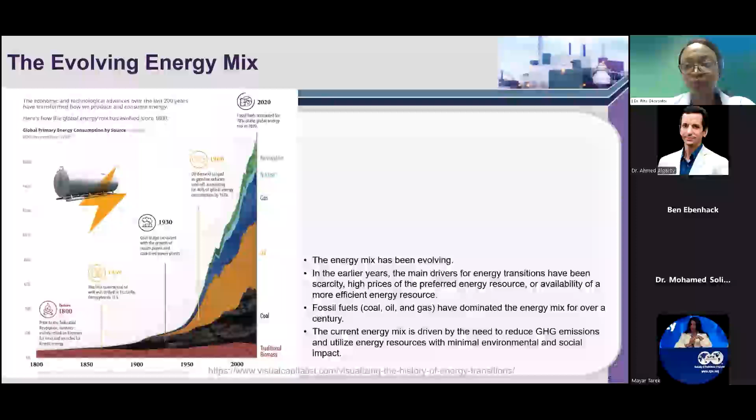So it's been changing in different percentages of different sources of energy. In the earlier years, the main driver for replacement of one fuel source over another has been scarcity or high prices, so demand and supply has driven a lot of it. But more recently, what we're beginning to see is the need to reduce greenhouse gas emissions and utilize resources that are closer to us, with minimal environmental and social impact. So the drivers for the energy mix now and moving forward are no longer solely demand and supply, but energy security, and not impacting our environment socially and environmentally.

So in a broad sense, we look at different sectors that have utilized fuel before now and the associated emissions with them. This figure shows different sectors: industry, electricity, agriculture, transport, and buildings, to look at their percentage contribution of emissions. The reason why it's good to look at it from this perspective is because that way, if we're trying to look for solutions to address emissions, we could actually go on a sector by sector basis.

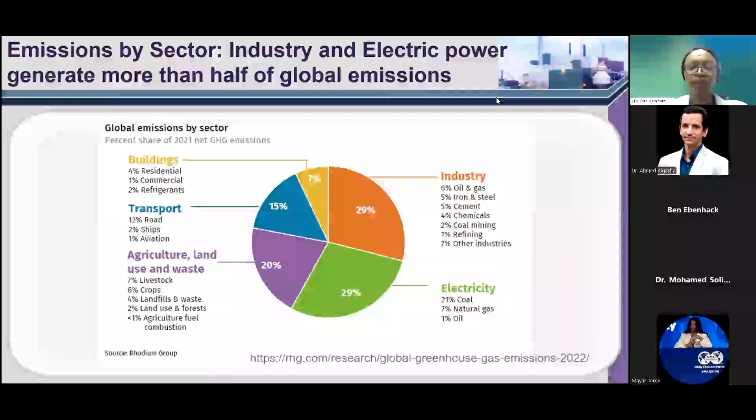Let me see if I can remove this stuff here. Okay, all right. So with that, when we think about pathways to decarbonization, we see things like when we look at buildings, for instance, we try to think about ways to reduce emissions.

For buildings, we have energy efficiency and conservation approaches. When we think about the transport sector, we could either think about electrification or using cleaner fuels. Then we look at the agricultural sector and think about how we can make changes to our land use to reduce emissions. And then we have things like carbon removal and carbon capture, utilization and storage that address a mix of different sectors, especially electricity generating sectors, power generating sectors.

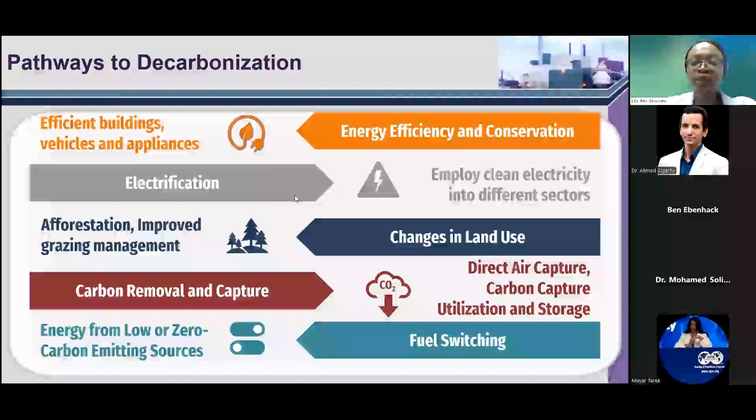Then fuel switching comes when we consider replacing a source of fuel or energy that we have with something else that is low emitting or zero emitting in terms of greenhouse gas emissions and carbon. So the question is, where does hydrogen come in all of this? Let's start with, why should we even be having hydrogen? So we think about hydrogen in the context of the hydrogen economy. What we're trying to say here is that we're beginning to replace different parts, sectors of the system where we would have been using all the other sources of fuel that may be generating carbon.

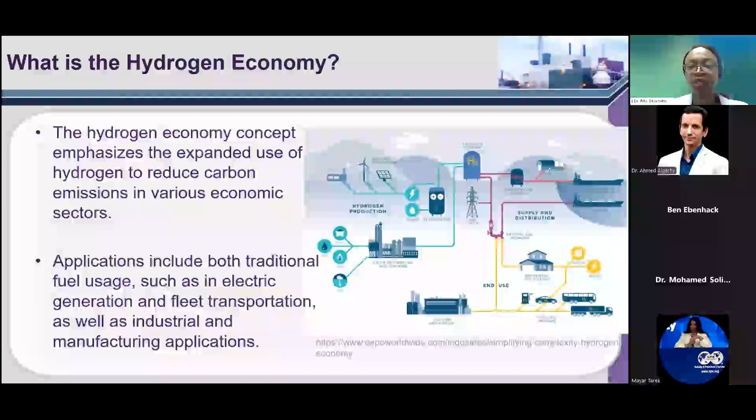So we kind of replace those systems with hydrogen. So we'll find it in things like our industries, we'll find it in electricity generation, we'll find the use of hydrogen in transportation. So that's basically what a hydrogen economy is all about. If we can find ways of replacing those other fuels with hydrogen, then we are successful in our hydrogen economy.

So why hydrogen? It's considered the most abundant element in the universe, and it exists in many forms. Prior to now, a lot of thought about hydrogen was that it didn't exist on its own, and it exists in combination with other materials or elements. But we are beginning to see that we could have hydrogen in the subsurface, which can exist by itself.

So hydrogen carries an exceptionally high energy content by weight, and I'm going to have a slide where I discuss some of the terminologies that I'll be using, so I'll explain what that is. And then when we combine hydrogen with oxygen in combustion, we do not yield particulate emissions or carbon dioxide, because this reaction between hydrogen and oxygen yields water.

We can integrate hydrogen with our renewable energy markets, and I also have a section that looks at the fluctuations in some of the renewable energy sources, like when we have highs and lows, times of the day when we have more solar versus other times of the day, and how we can integrate hydrogen as a carrier or as a storage mechanism for complementing renewable energy.

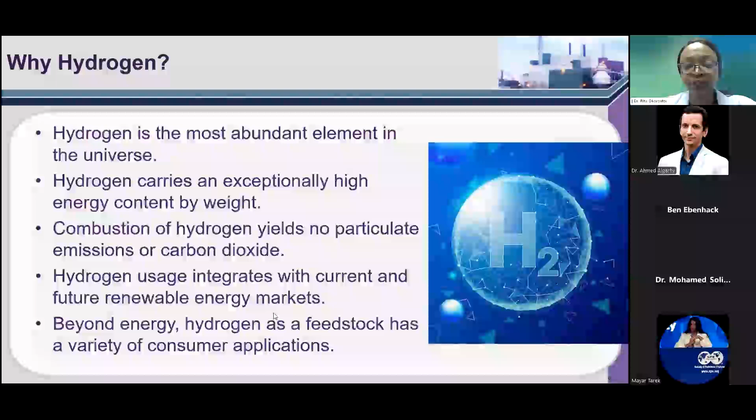Well, beyond energy, hydrogen is a feedstock that has various other consumer applications. In today's talk, I won't be able to go through all the applications and uses of hydrogen, but I will point you in the direction of where you can see this in detail. So in terms of terminology, the kind of things that you might be hearing, I might be throwing out these words. I just want to lay a foundation.

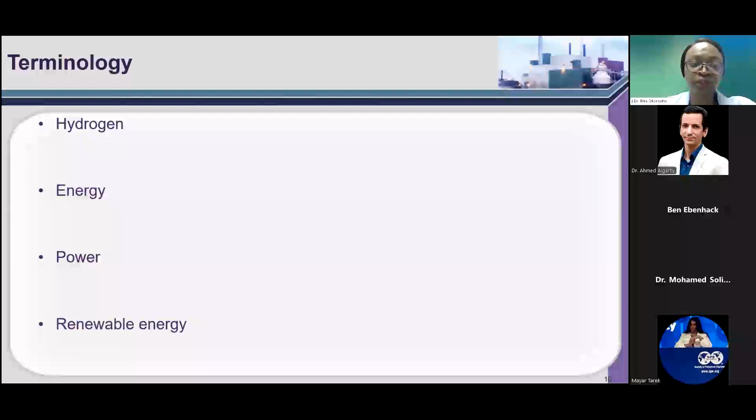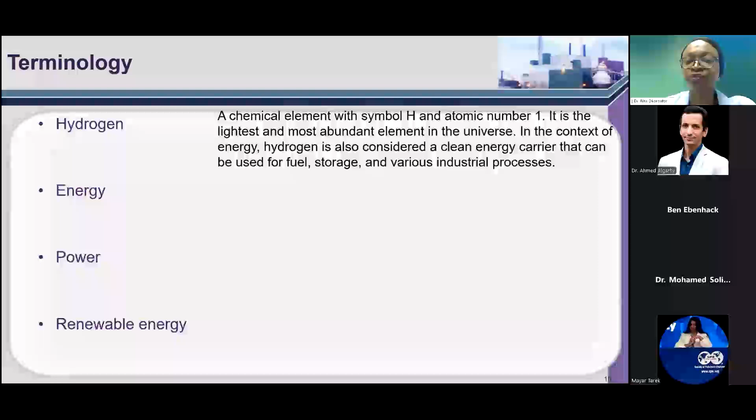Hydrogen is that chemical element with the symbol H and atomic number one, where if we recall our periodic table, it's at one corner of the periodic table. In the context of energy, it is considered a clean energy carrier that can be used as a fuel, for storage and other industrial processes. When we talk about energy, it's the ability or capacity to do work. And if you see any slide of mine that is saying something in joules, kilowatt hours, or megawatt hours, it means I'm talking about energy.

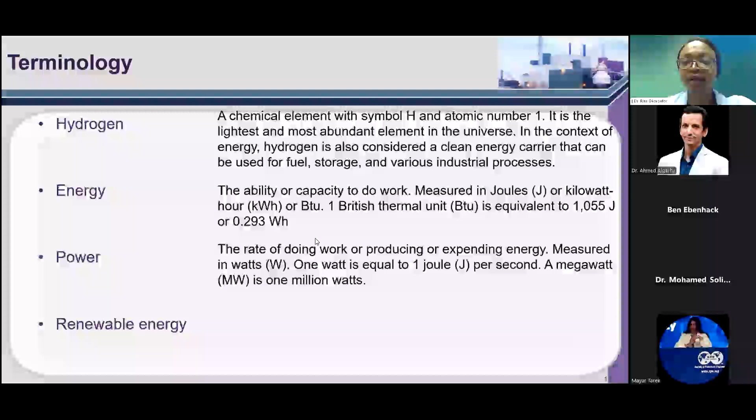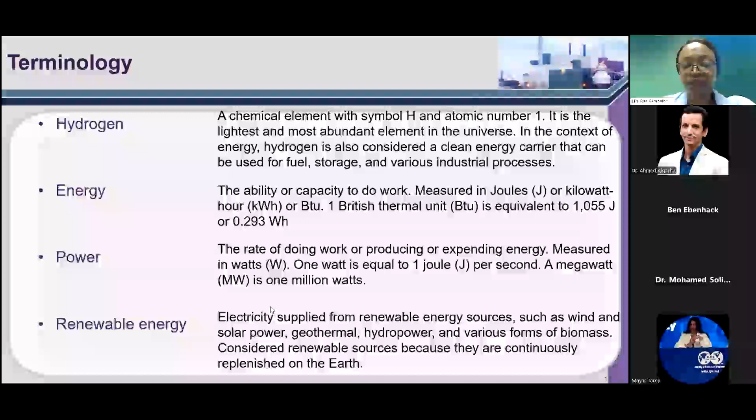When I divide my energy by time, I have a rate. So power is the rate of doing work or expending energy, usually measured in watts. Now, if you see my slide with something like joules per second or watts or megawatts, I'm talking about power. And then renewable energy will come up a lot because hydrogen is a way to complement our renewable energy.

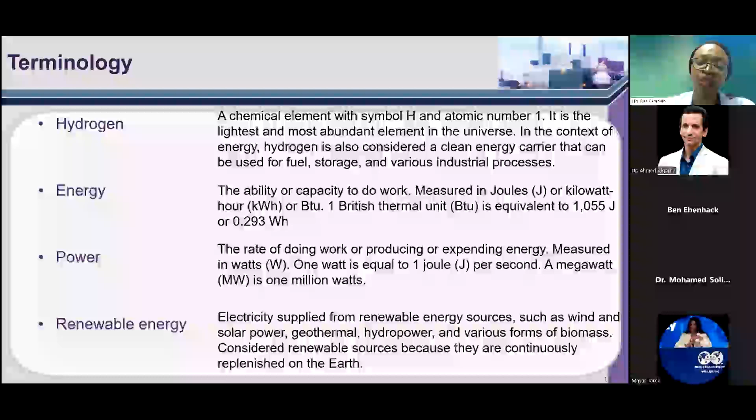And so that is the energy that is supplied from a renewable source like solar, wind, geothermal energy, hydropower, or any source that is easy to replenish. As we're taking that source out for use, it's being replenished in the subsurface or where it's coming from.

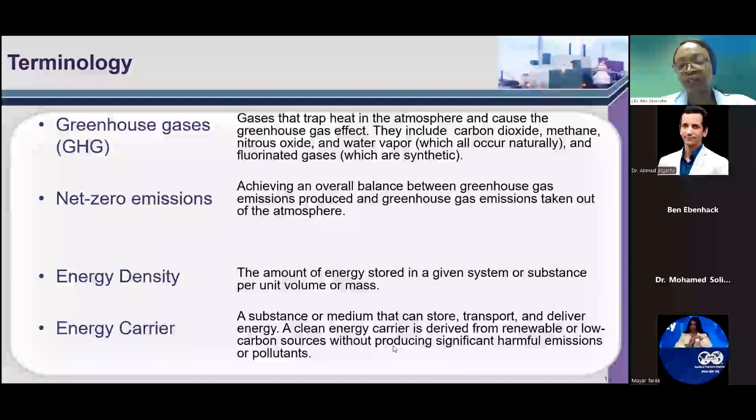And then an energy carrier is a substance that can store, transport, and deliver energy. You may be converting energy from one form to this energy carrier and then later on retrieving your energy. So hydrogen is an energy carrier. In this case, we are able to derive it from renewable or low carbon energy sources without producing significant harmful emissions or pollutants.

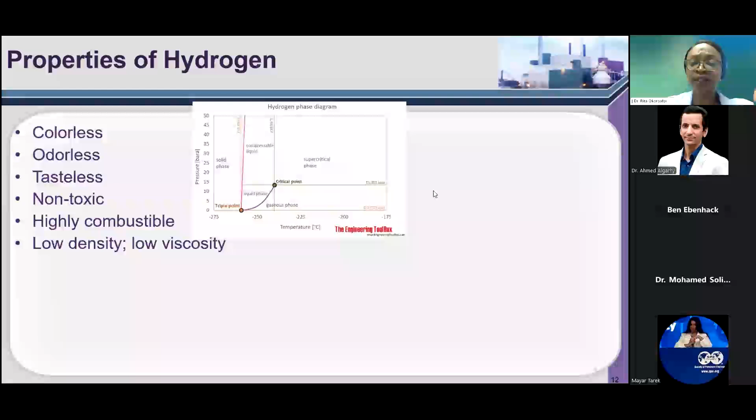Okay, so it means that I will need a lot of volume to be able to generate the amount of energy that perhaps methane will do. So I will need much more hydrogen in terms of volume to generate energy compared to something like methane because of the density.

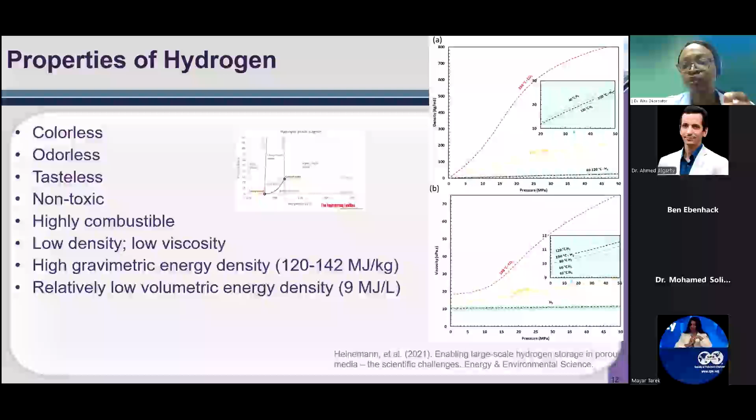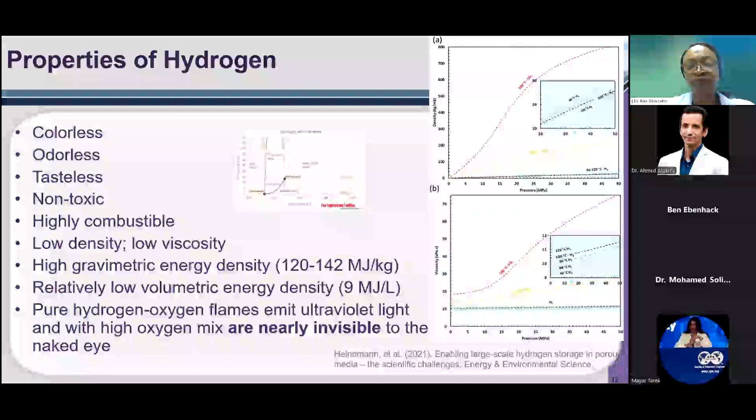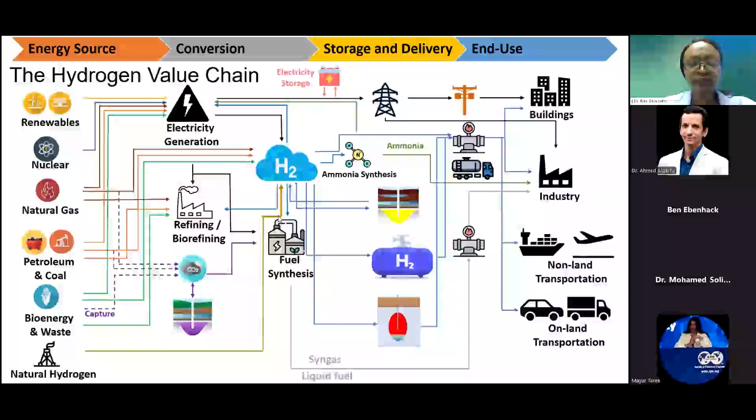The current uses of hydrogen, and this keeps evolving as technology evolves. Some of the things that are listed here are not in high development phases. Some of them are in early testing and development phases. In other cases, especially in the industry, we have a lot of uses of hydrogen.

So at your convenience, feel free to visit this YouTube link to get an explanation of the different ways in which we use hydrogen. But the main thing is that the use of hydrogen in the industry has grown since 1975, and associated with it is also a high amount of CO2 generation, that's carbon dioxide generation.

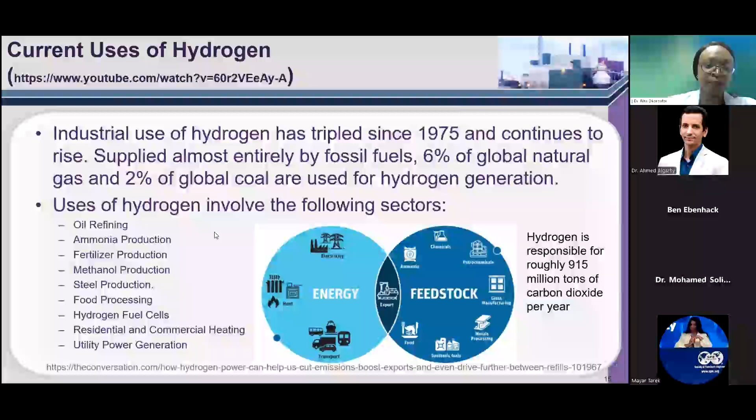So how do we produce or generate the hydrogen? So if we are not having natural hydrogen, there are different ways. We could get it from fossil fuels or from renewable sources. And within fossil fuels, a very common method is steam methane reforming, which I will talk about today.

And then I'll also talk about renewable sources, when we split water into hydrogen and oxygen, it goes through the process of electrolysis. And within electrolysis, there are different methods. So the alkaline method and the PEM, which uses a membrane, these methods are more advanced, while we have the solid oxide and a couple of others that are still being tested and getting into commercialization phases.

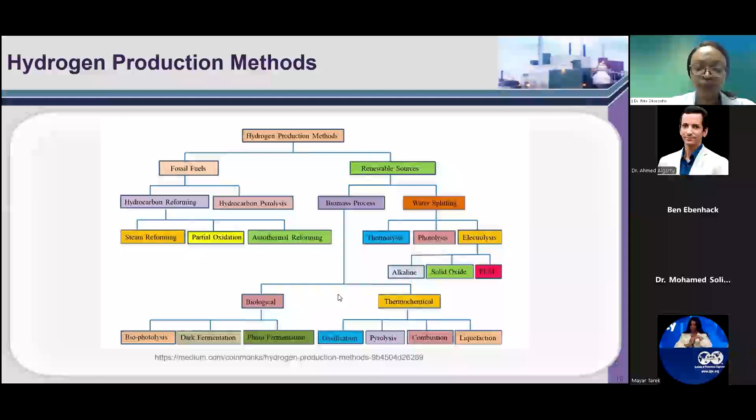So three key methods, pathways for generating hydrogen which is not natural. We have steam methane reforming. And what happens is that we get natural gas and we bring it in contact with very high temperature steam. And this creates a synthetic gas, which is a mixture of hydrogen, carbon monoxide, and in some cases, a small amount of carbon dioxide. Now, with this carbon monoxide, if we further expose it to the high temperature steam, we are able to get hydrogen, and then carbon dioxide is also produced.

Okay, so there's a whole process where we go through, we have a water gas shift process, we have the PSA, pressure swing adsorption, processes. So this is a process that is well known and has been used a lot for generating hydrogen.

With gasification, we would be dealing not with natural gas at this point, but with something like coal or biomass. And we have high temperature steam and oxygen. It's not a process that goes through complete combustion. So we form this syngas, the synthetic gas that contains hydrogen and carbon monoxide, and then further reaction with steam brings about the production of hydrogen.

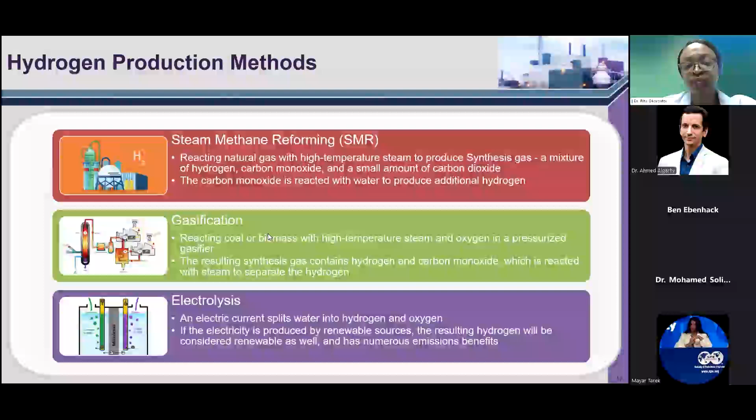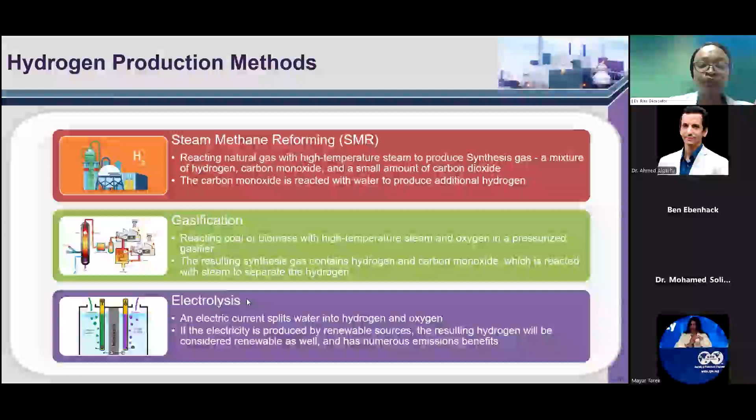I bring in fuel cells here. It's not a way of generating hydrogen, but it's one of the ways of utilizing hydrogen. And in this case, it comes from a similar principle as the polymer electrolyte membrane that was being used in electrolysis. But now, instead of creating the hydrogen, it's utilizing the hydrogen to generate energy. So like the reverse process.

And so we can use this in things like vehicles. And so you hear of hydrogen fuel cell vehicles, where we have this fuel cell stack that embedded in it is this membrane that would be able to utilize hydrogen from a source to generate energy. And this energy is what's going to be used to run the car.

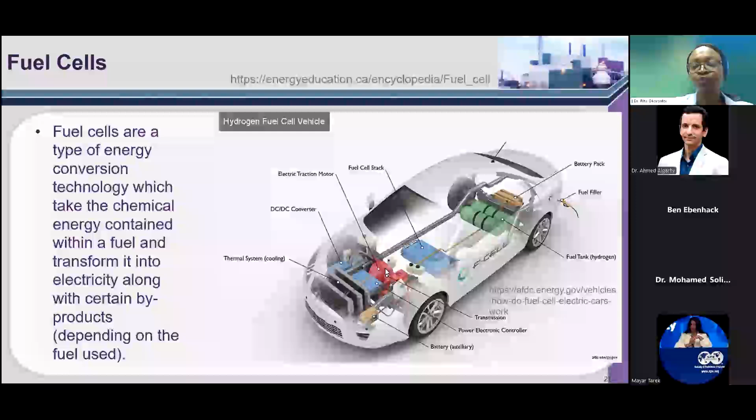Now, speaking of natural hydrogen, there are several instances where natural hydrogen itself has been identified, coming from seeps beneath the earth or being found in some reservoirs, okay? So figures 1, 2, and 3 are mostly how we define the ways in which the hydrogen is generated. So this first one is based on radiolysis. It's a combination of water with some of the radioactive elements in the subsurface to release hydrogen.

We have serpentinization, in which case water comes in contact with olivine-rich rocks. And through this process, the chemical reaction that takes place, hydrogen is produced. Or deep-seated, I can't really say exactly what's going on below this point, but we do know that from deep-seated origins, we've had hydrogen.

And what this figure also shows are pathways in which we could lose some of the hydrogen that is generated, which might be some reasons why, if we do go into some places where we expect to see hydrogen, we don't see a lot of it. And that's because hydrogen is such a small molecule, and it could pass through very small seeps. It could pass through any pores, seeps, and things like that.

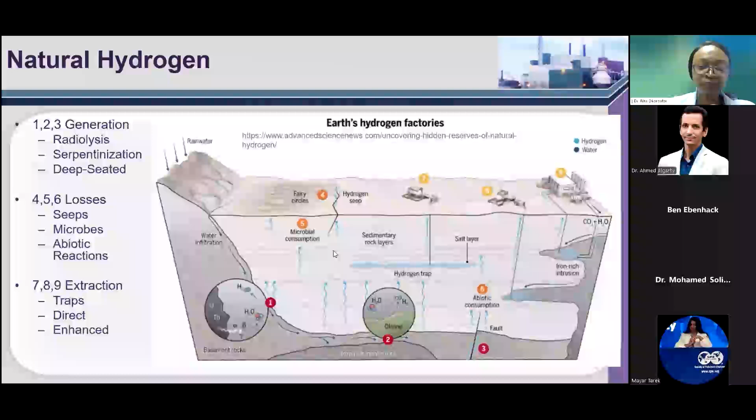So we've looked at the different ways in which we could generate hydrogen, but this process of serpentinization, where we have the reaction of water with olivine-rich rocks, is something that is easier to replicate if we do have access to olivine-rich rocks, okay?

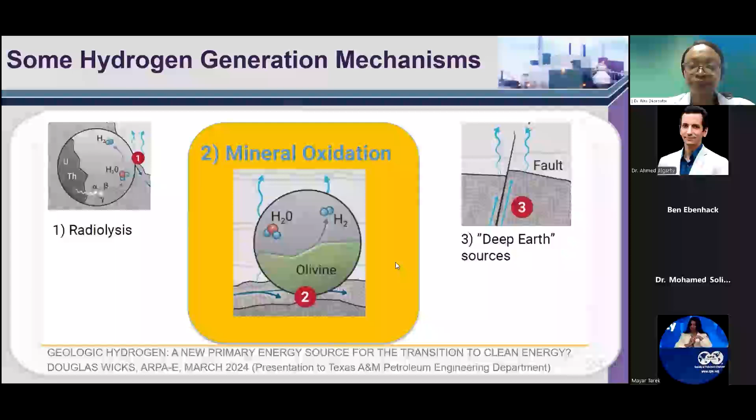There are several reasons why, because depending on the source rock and the pathways, we could have different things produced alongside the hydrogen itself. This depends on what gases exist, the method of reactions, different geothermal gradients and pressure conditions, and any external contaminations.

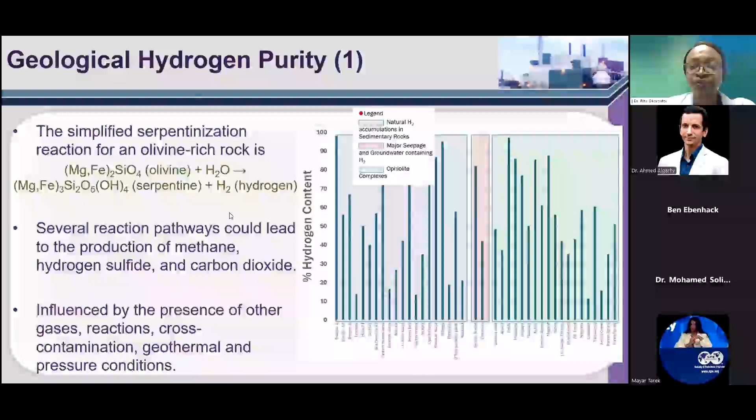If possible, we could engineer these systems if we're able to find these olivine-rich rocks, through the use of catalysts, thermal stimulation, hydraulic stimulation, or biostimulation, or a combination of all of them.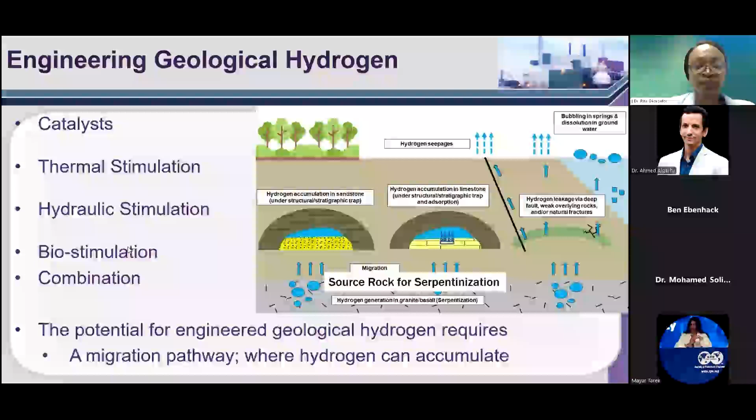But the key thing is that even if we generate it, we need somewhere it can be accumulated and trapped, so that people can later go back, drill wells, and assess this trapped or accumulated hydrogen.

The different colors of hydrogen all depend on how it is produced. We have green hydrogen, produced from the electrolysis of water using renewable sources.

I would go to gray and brown next, because gray hydrogen comes from steam methane reforming. When we go through that process, we produce CO2, carbon dioxide. Similarly, if we go through the process of gasification from coal, we also produce CO2.

Now, if from these two processes we are able to capture the carbon dioxide and store it or use it, then we have blue hydrogen.

We have purple or pink hydrogen, produced by electrolysis using nuclear power. We have turquoise hydrogen, based on hydrogen methane pyrolysis. And then there's yellow hydrogen, when we use electricity from the grid to go through electrolysis, rather than going directly to wind, solar, or other renewable sources—we're using grid power. Then there's white hydrogen, which I usually refer to as naturally occurring hydrogen.

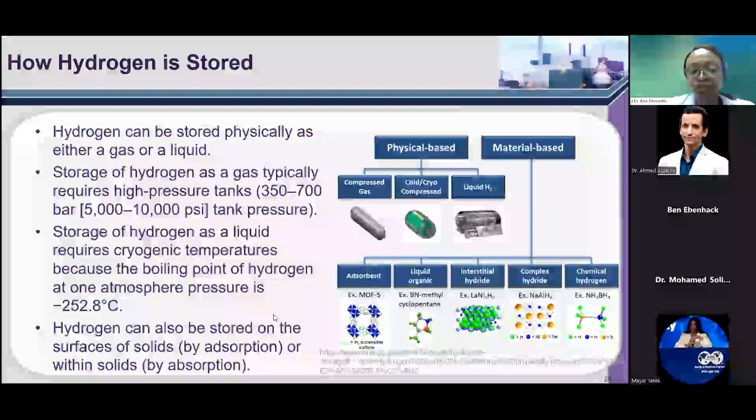But when we begin to think about large-scale hydrogen storage, we have to think about using the subsurface, which comes with pressure, and pressure helps with this compression part of things.

In terms of subsurface storage, we use things like depleted fields—fields that we may have used to produce gas and oil. After we've produced those fluids, we have some space and can inject hydrogen into them, preferably gas reservoirs, because oil can lead to contamination of the hydrogen.

We also have what we call salt formations or salt caverns. We could go into salt formations, drill a well, use water to create a hole in the subsurface, and then this hole that is created is where we later inject the hydrogen.

Or we could inject the hydrogen into saline aquifers. These are reservoirs of water that we would not use as groundwater or drinking water, but we find them all over the world, so we could store hydrogen there.

Now, there are a couple of challenges that come with this, and so we have to be careful in our site selections to know which fields will be best to store large quantities of hydrogen.

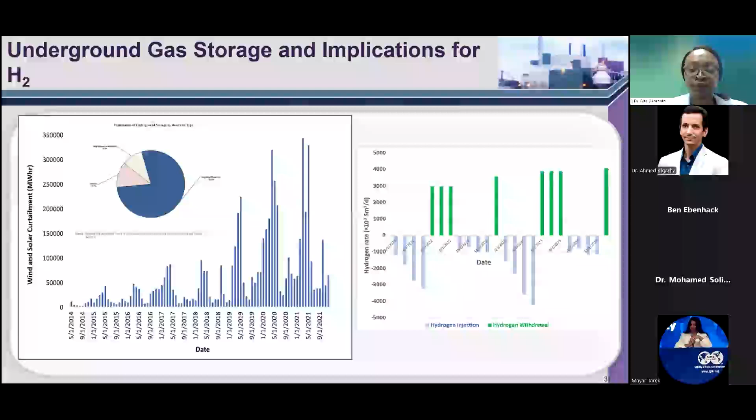And the method in which I'm converting my energy from solar or wind to hydrogen using an electrolyzer - if I can improve my efficiency to somewhere around 33 kilowatt-hours per kilogram of hydrogen, I should be able to improve my round trip efficiency. Overall, improving my electrolyzer efficiency is going to help me improve the amount of hydrogen I can get from my power-to-gas-to-power process.

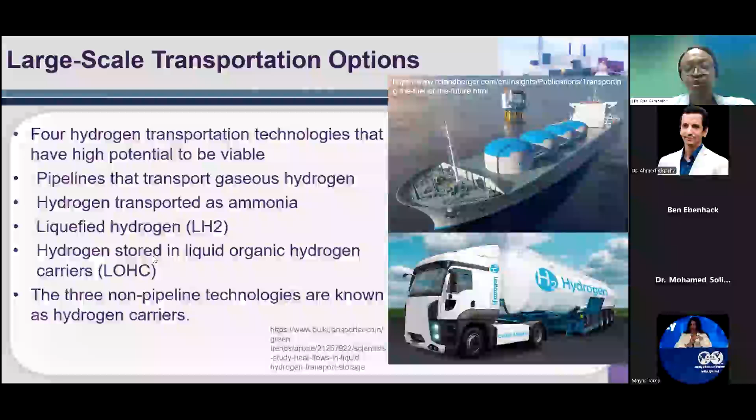Now transportation is another thing we think about. How do we transport hydrogen? Because if we want to have a hydrogen economy, we need to be able to move this hydrogen to the places where it's needed. So there's the possibility of using pipelines, converting the hydrogen into ammonia, liquefying the hydrogen by reducing the temperature, or storing the hydrogen as a liquid organic hydrogen carrier.

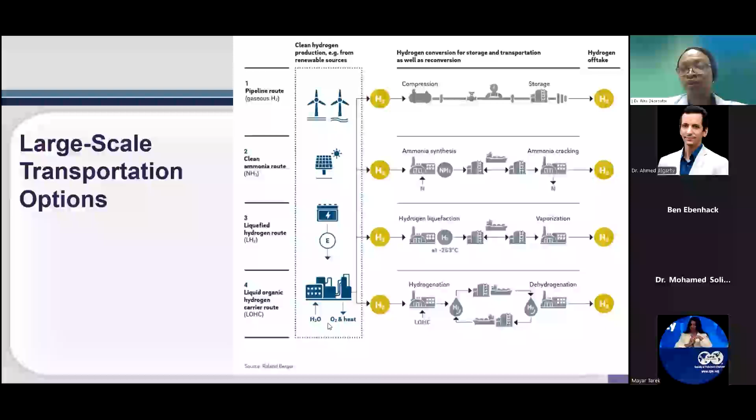And if you have a carrier, you go through the process of hydrogenation, and your hydrogen is contained in there. Once you get to your destination, you go through dehydrogenation to extract your hydrogen. So all of these processes are energy intensive in one way or another, either through cooling or through the conversion process, but they all have different energy requirements.

So let's look at some questions. One question that I usually get is, isn't hydrogen going to explode? If we have a hydrogen economy, isn't everything just going to explode?

So granted, hydrogen has properties such that it combusts quite easily. It has a lower ignition energy than gasoline or natural gas, and when it burns it's nearly invisible, so it might not be easy to identify. It has what we call a wide range of flammability concentrations in air, so it'll be flammable over a wide range of hydrogen concentrations. It poses this safety risk and hazard, and it's something of concern, but the good thing is that other industries have been using hydrogen.

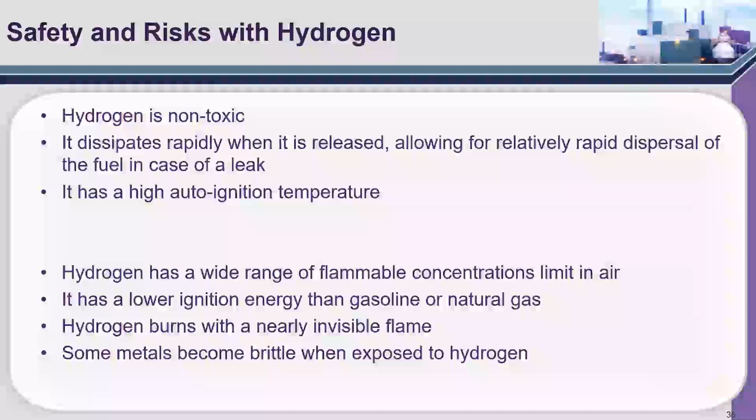And so there are lots of safety protocols that have been put in place. As we try to think about a hydrogen economy, we would be thinking about how do we incorporate those lessons learned from the different industries? How do we implement it as we make it scale? What kind of detections do we need? What kind of measurements should we be taking? What kind of pressures and temperatures should we be operating? And be thinking about our fire triangle, what do we remove such that we don't have hydrogen combusting?

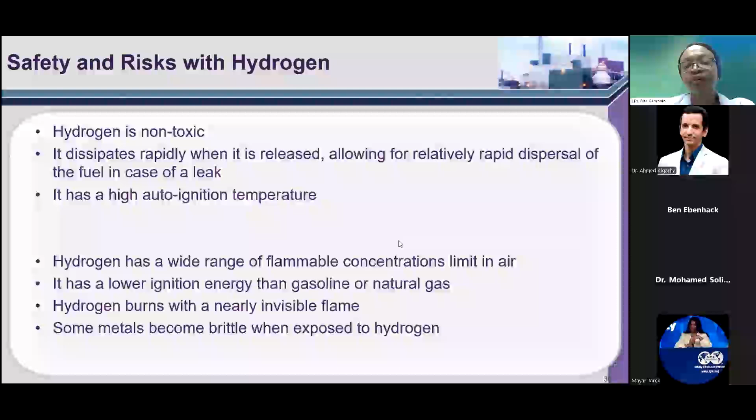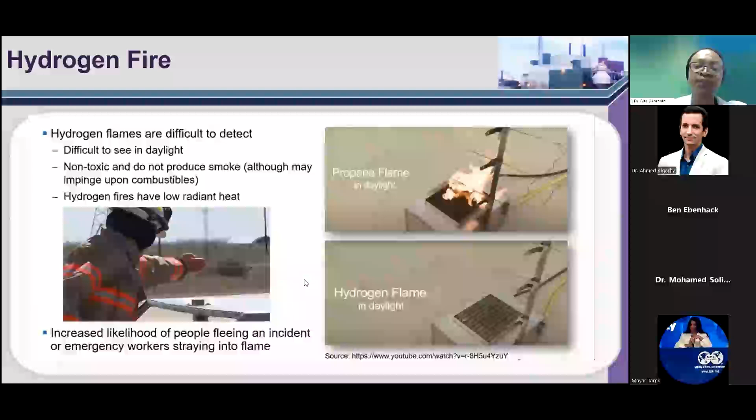This picture is basically showing an example of a hydrogen fire. You could feel it, but it's not something you can see. So this is propane flame in daylight versus hydrogen flame in daylight. And so we use some kind of thermal sensors to be able to identify hydrogen.

Another challenge with hydrogen comes from its compatibility with materials. Anything we're going to be using, the pipelines, wellheads, storage tanks, we need to be sure they can withstand hydrogen, because at certain pressures and temperatures, hydrogen can cause embrittlement. It will weaken the metal, it will diffuse into the metal and weaken these metals. And so when that happens, we could have structural failures.

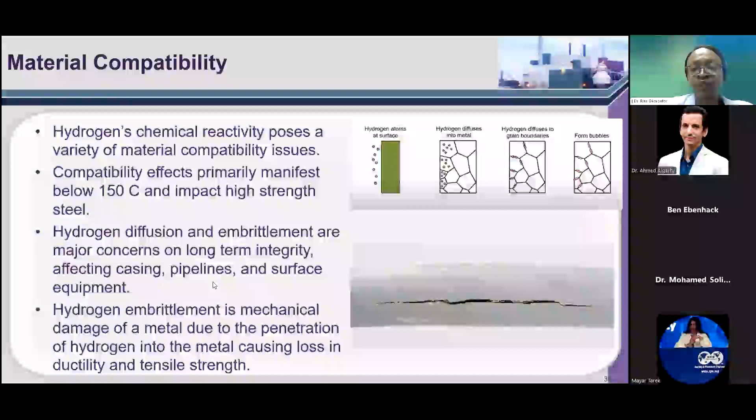And that's something we want to avoid when we're talking about a hydrogen economy. So your pipelines, your storage tanks, and all of these being affected by the hydrogen. But an interesting thing is we do have ways of material selection. We also know what are some pressures at which we are going to lose the strength of our materials. So proper design, material selection, though expensive, would help us overcome the hydrogen compatibility issues.

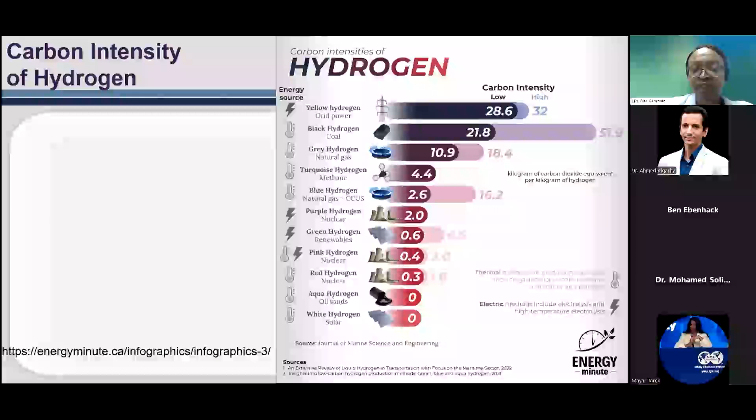Some other issues with hydrogen is different pathways produce high intensity of carbon. And so we should be thinking about what are the ways in which we can reduce the carbon intensity of hydrogen. And then cost. Different methods of producing hydrogen come with different costs. So it's most likely we're having a trade-off, high cost for low carbon intensities and low cost for high carbon intensities. So the key is, where can we get low costs and low carbon intensities, and can we make things like natural hydrogen a reality?

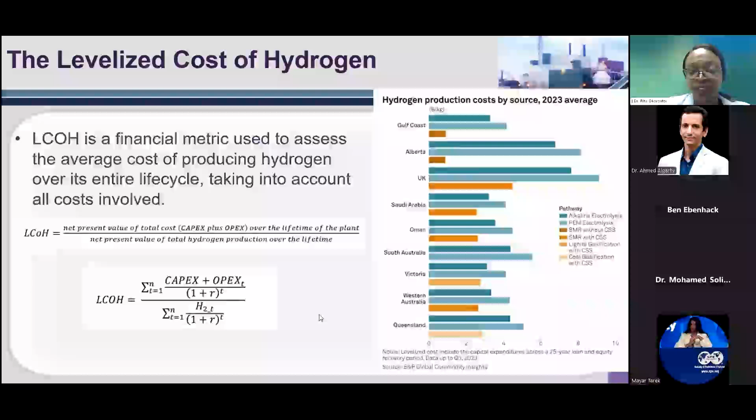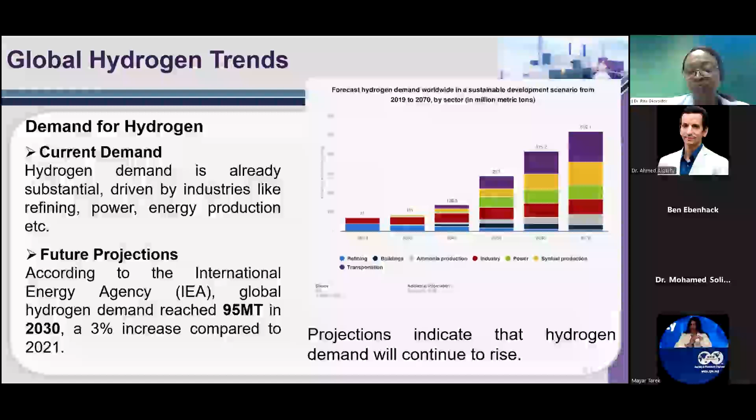So the demand for hydrogen is expected to grow, and we expect that hydrogen will be used in several parts of the industry, have other uses. And so this is what is going to be driving this hydrogen economy. For us, what we need to think about is, how do we scale up our low carbon intensity hydrogen sources? What kind of technology advancements do we need to improve efficiencies? As we could see, the conversion of power to gas wasn't giving us the kind of efficiencies we need. So how do we improve the efficiency?

And then we need to think about what kind of policy support would help us to do research, to drive down, to scale up some kind of technologies that are needed, just to support the economy for hydrogen. So I think I should be stopping now and leave room for questions and comments. So thank you very much.